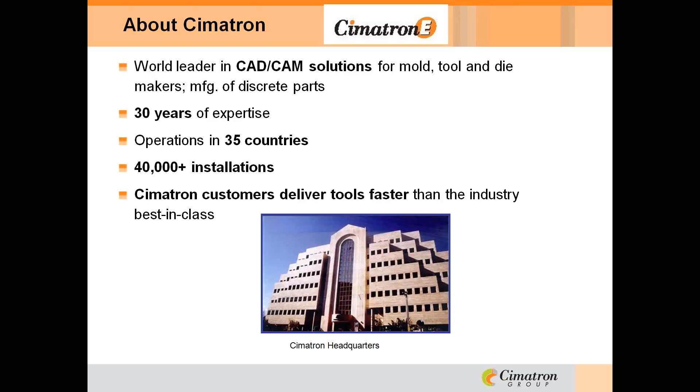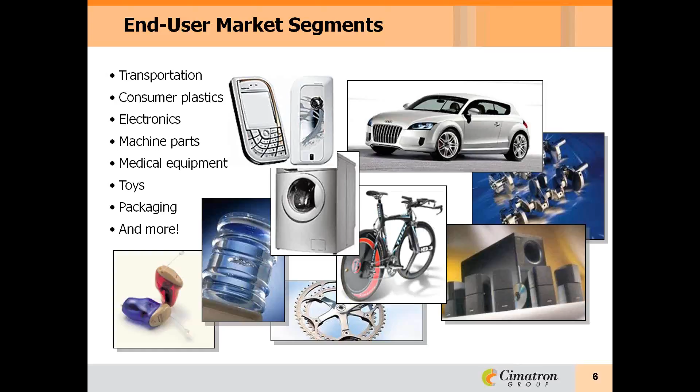We have loyal customers in 35 countries and over 40,000 installs in place. Companies using CimatronE design and build a wide range of products. Our global presence means that we can often be found working with multinational companies in a variety of markets, and we help them find the solutions that they need.

Not long ago, Aberdeen, an independent research group, conducted a survey on tooling delivery times. Delivery time is where the real competition is for new tooling, and we recognize it as a critical measurement. So we're very happy to say that shops using CimatronE will typically outperform even the best rated shops in this regard.

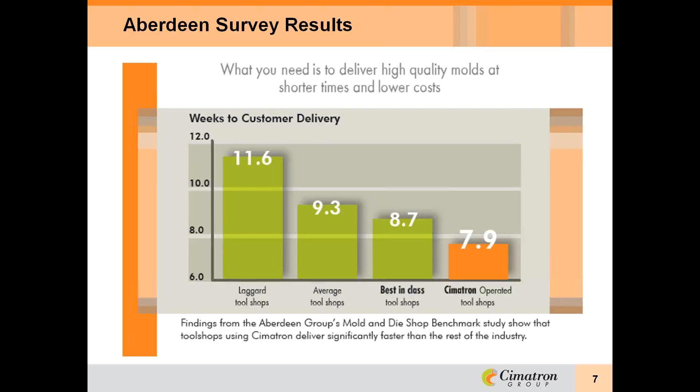In our presentation today, we want to elaborate more on some points that we first laid out in an article published in the December issue of Mold Making Technology magazine. And we're going to start with total process thinking. If the goal is truly to deliver on time and better than the other guy, then there's no room for any holdups in your system. New technologies can and do make for a better process, but only when they streamline the job flow rather than reroute it to some other spot.

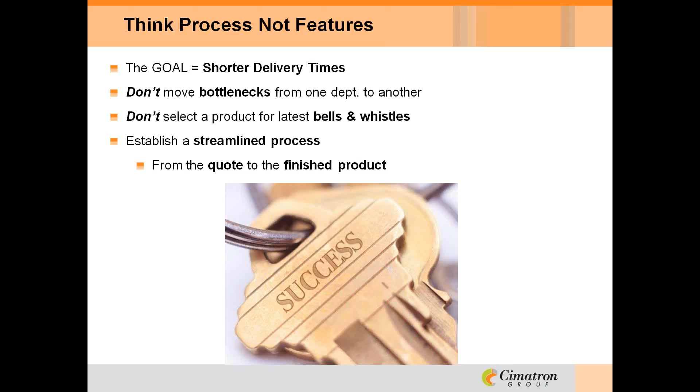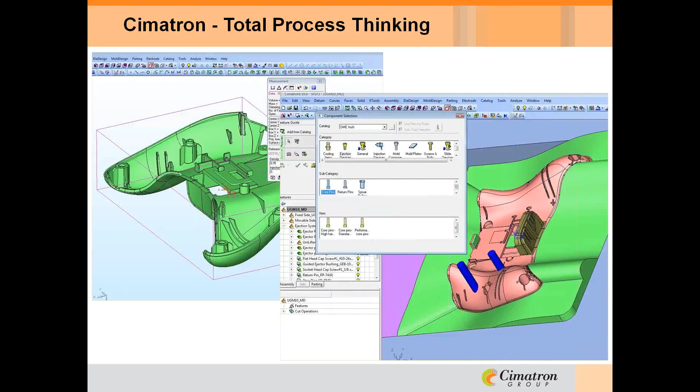CimatronE CAD/CAM software covers every facet of quote, of design, and of manufacture. It's our goal to provide the best functionality for the task at hand, while always keeping the next task in mind. When delivery times are compressed, seamless flow is essential. So jobs move quickly from part analysis and quote to tool design to NC programming and electrode design.

Now, seamless flow does not, however, mean that the process must be linear, and that's important. The way to add efficiency is to facilitate every task with enough initial data to get started, and then keep those doors open and information flowing to simultaneous activities. And it's possible when using a unified CAD/CAM package that understands the needs of tooling and is built with this total process in mind.

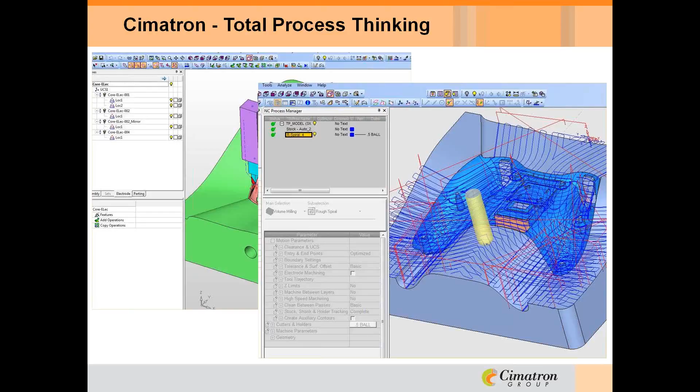When it comes to quoting for tooling, which is our other point here, you're going to need a lot of information from a part and not a lot of time. Part size, volume, projected area—these all help you determine the mold size and the press that will accommodate it.

Mapping techniques can be used. They can show curvature on surfaces, and they can show smoothness problems on surfaces. We can also talk about analysis of draft angles. These will quickly identify problem areas for molding, as well as highlight undercut areas that add complexity to the tooling.

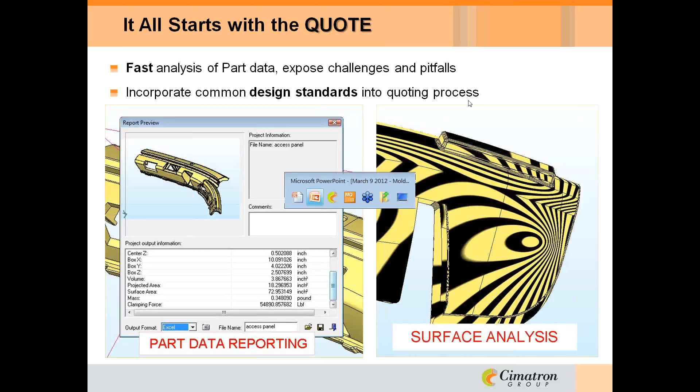This is my first opportunity to switch over to CimatronE itself, and here I want to show a little bit about draft angle analysis on an example part.

So the system will consider a direction for mold draw. Let's go in there.

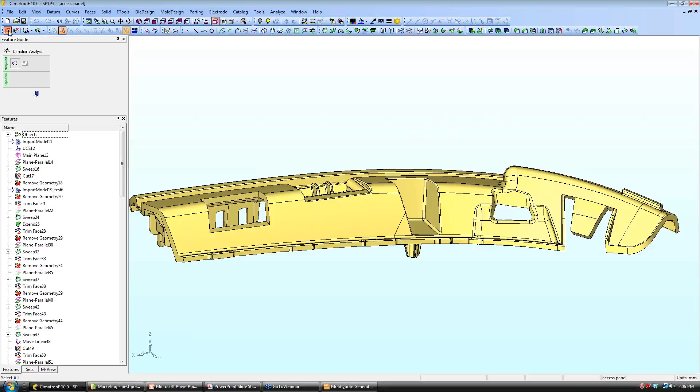What we have is a colored display that allows potential problems to easily be found. Here we're looking in one direction, like from the top. We can even use the cursor to give specific information on certain angles. So let's say on the back of this part, we could look around and possibly find problem areas that are very difficult to see just with the eye.

In this case, any area going red is going to indicate areas that cannot be molded along the main direction of draw and might require more expensive cams or lifters.

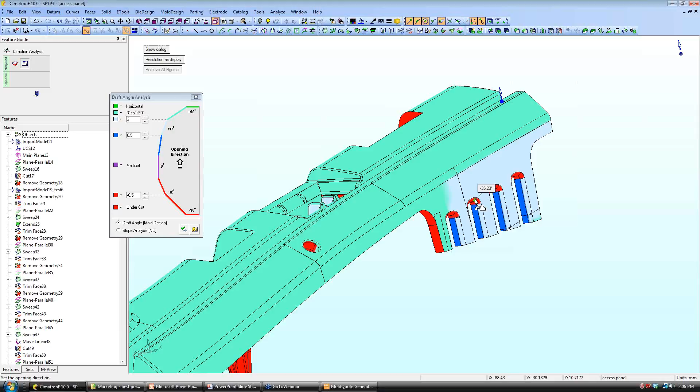On the screen now is what we call Mold Quote Generator. The CimatronE Mold Quote Generator is another application to help mold makers achieve more accurate quotations by using the project details from CimatronE and also the cost-related details from your prior experience.

All of this goes into a database. It's used to store your quoted work, and when combined with standard practices and components, can estimate the labor and material cost.

We can adjust a lot of things in this product, but again, it learns from the previous molds that you've designed. They stay in the database, and there's a link to the data that you're getting out of CimatronE.

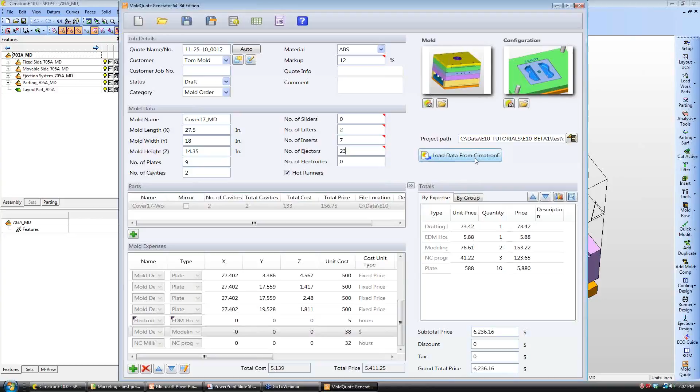We'll come back to our presentation for a second to move on to the next point, and that is standardization whenever possible—that was a point that we laid out in our December article as well. And what it means is a lot more than purchasing off-the-shelf components. It means striving for efficiency by finding repeatable patterns of design and methods of machining.

CimatronE makes it easy to use the components from previous tool designs and provides a template mechanism that repeats your favorite styles of NC, of electrode design, or even drafting. I want to demonstrate a little with that.

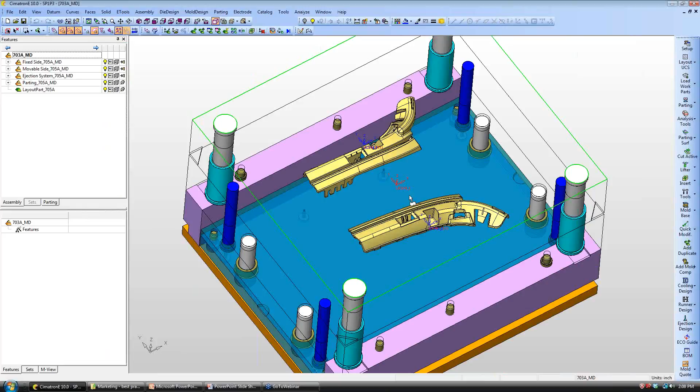So in a 3D environment, any work you've done already to prepare for quote is saved for tool design. On screen right now is a layout of both left and right-hand versions of the part. Stuff that was easily placed in for quote can be edited.

We can look at some standard components here. So these might be from common industry suppliers, or we have an easily customized table CimatronE developed for mold and die makers alike who build in-house standards.

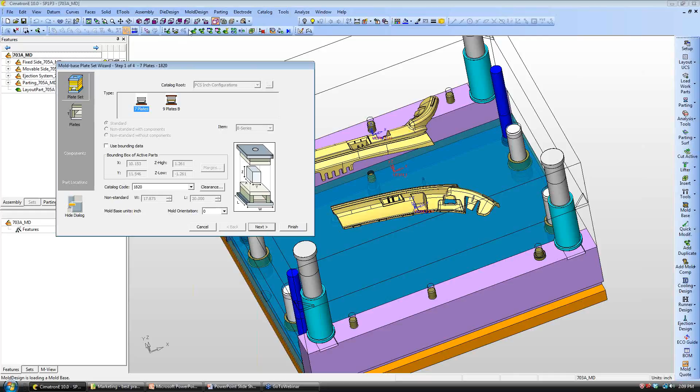Either way, edits to the quoted starting point are easy to apply as the tool design progresses. So let's come down to just the parts here.

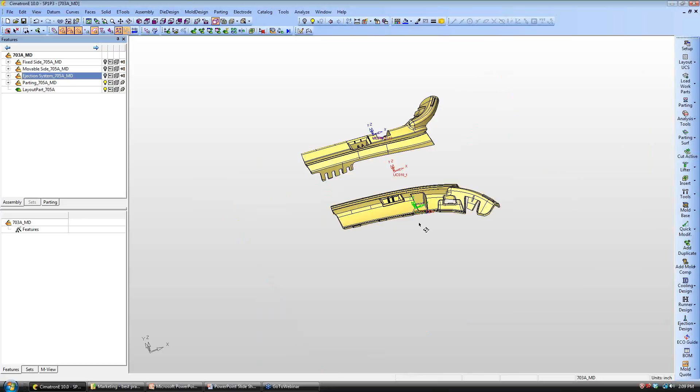One of the best tools in the CAD industry for finding parting lines is CimatronE's Quick Split. Regardless of the part quality, this is an analysis that scans every surface, and even minute problems that may have been previously overlooked are going to be brought to light.

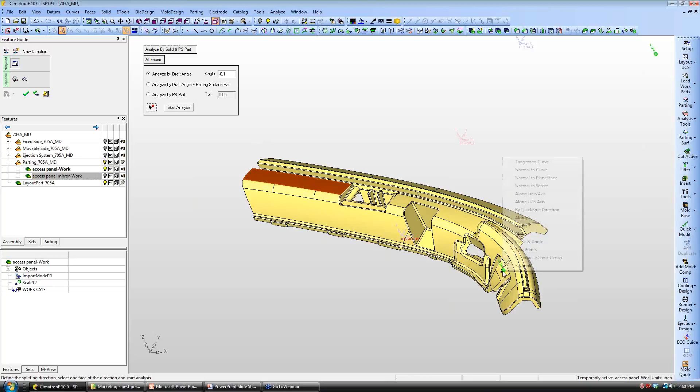Again, we have a vector to determine the direction of draw, and we run the analysis. The draft angle analysis is also in here if we want to take a look at that, but we've already seen it.

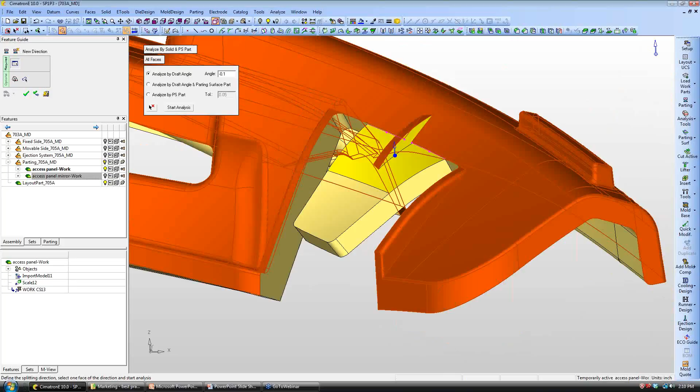What I want to point out here is this area in yellow and even these edges in pink. It's very small, so I'll have to zoom up quite a ways. But the bright yellow highlighted face is a face that's partially occluded by a very, very small overhang here. It's probably unintentional, but part mistakes like this have to be found early on in the tool design process, and Quick Split does help us do that.

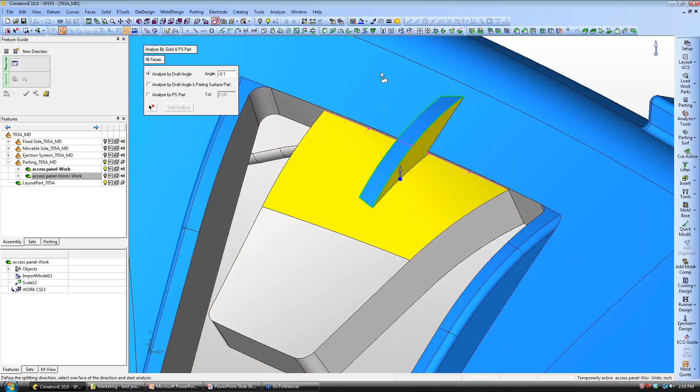Let's accept that side. We'll flip the arrow over and take a look at the bottom. Again, run the analysis.

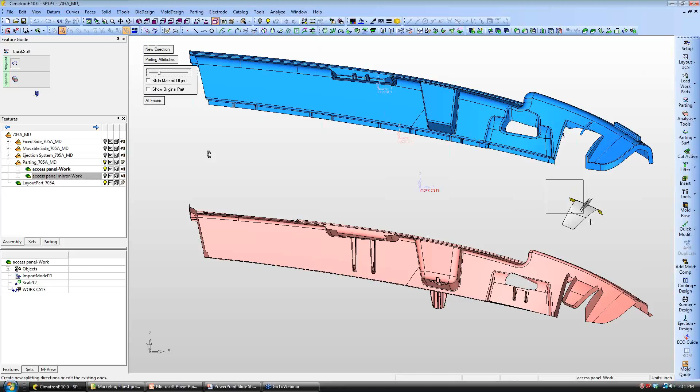So once we've got a little going here, we can open the part up, and we visually see a bit of the mold action that's going to take place very early on here just by dividing up these parts. Now anything that's left over is going to be something not assigned to cavity or core direction. These have to be looked at by a little bit further analysis.

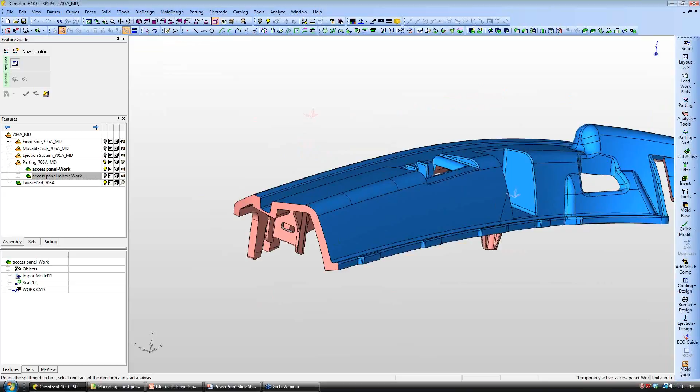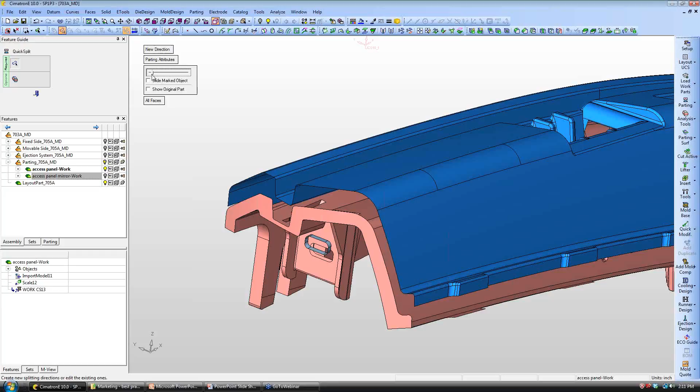So we'll come back to another direction, and we'll make the vector from any number of things. Let's say normal to face, and pick a surface to start analysis here. So any number of these pull directions can be specified and then animated to see how they'll look in the tool.

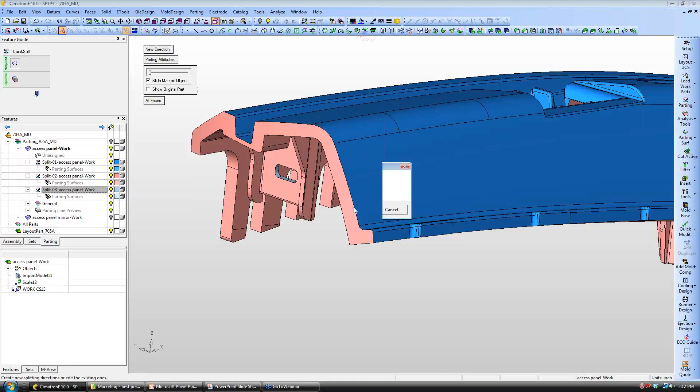Let's move a little farther ahead. So we've been working on the tool design here, building some shutoff. I'm going to access the Quick Split and get rid of one of the sets we've defined here so we can look at some of these other surfaces a little closer.

Mold design is made up of many tasks, and creating shutoff faces around the parting line is definitely an important one. Often this is complicated work, but good parting surface functions will save a lot of time. While design methods do vary, one common need is to extend the part faces while maintaining their natural shape, and Cimatron provides an excellent tool to do that.

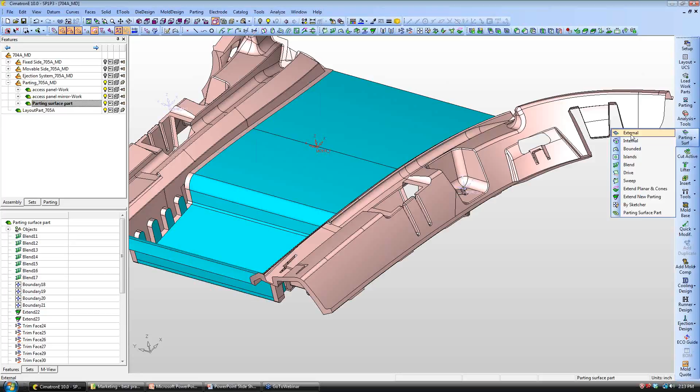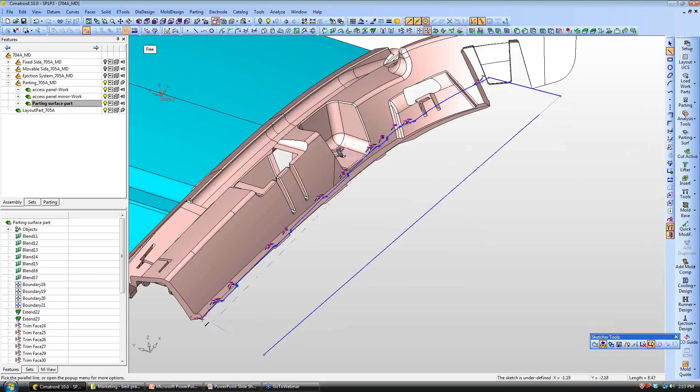Basically, we can look at any surface and make an unlimited amount of adjustments to the boundary live and on the screen. With a quick method of deleting some of those boundaries, we can now invent our own, much larger than before, which gives us an excellent preview and natural extension of a parting face.

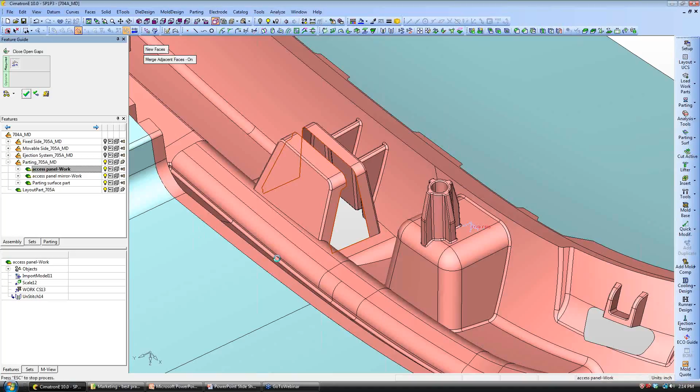That pretty much makes the ideal pocket for that area. While all of this is going on, creating surfaces, design, shutoff, any opportunity we have to order parts or to get machining started is going to compress those delivery times that we're talking about.

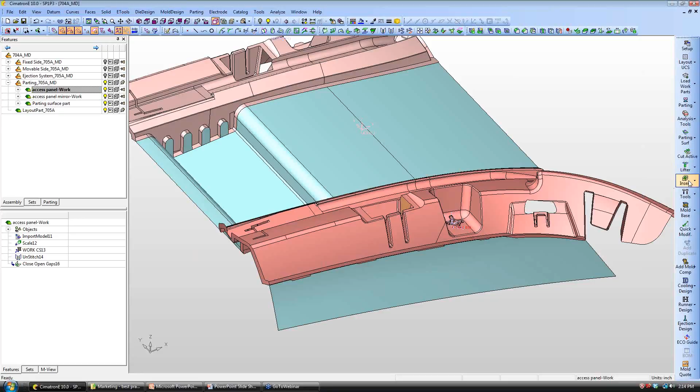So with very little data in place so far, what I want to do is show you a specialized tool we have for lifters or inserts, those kind of things. That's going to require pushing a couple buttons here. So let me turn on our ejection.

We had the mold base dropped in from the quote, and I'm going to go to Add Lifter, out to Standard Components. A lot to choose from here, and this is something we have developed out of the DME catalog.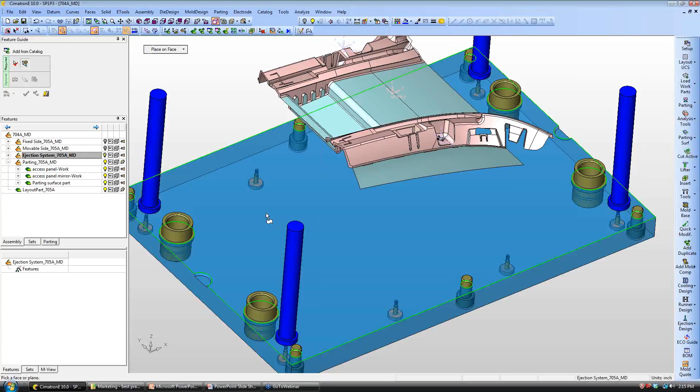To add an assembly, we just want to create a few references from our geometry that we have here already. And then we can drop a point on the screen, and make a few adjustments to the position.

So we're doing this well before any official cavity blocks, core blocks have been defined. But we can start roughing this stuff in, and it's more than just roughing it in. We can actually use it from this point.

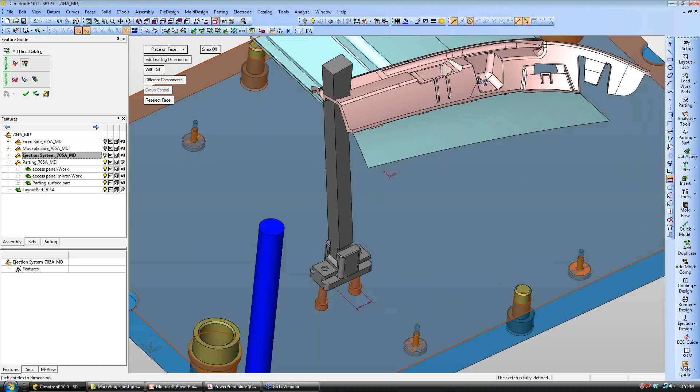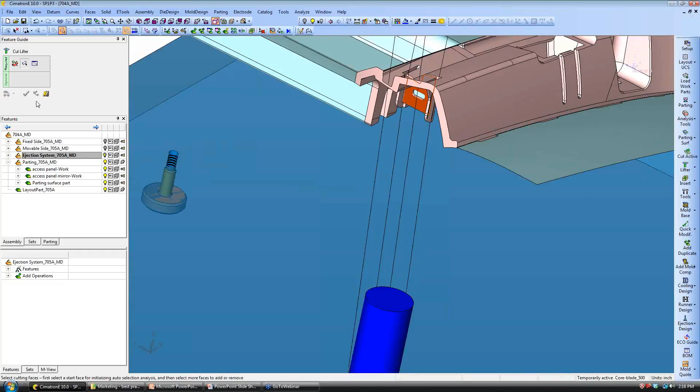So now that we've placed it in, I actually want to cut it to shape. And again, I'm going to do this by referencing nothing more than the original data. We don't have the cavity, core, etc. defined. But on this lifter blank, we already know we're going to need this shape, and to cut that on there.

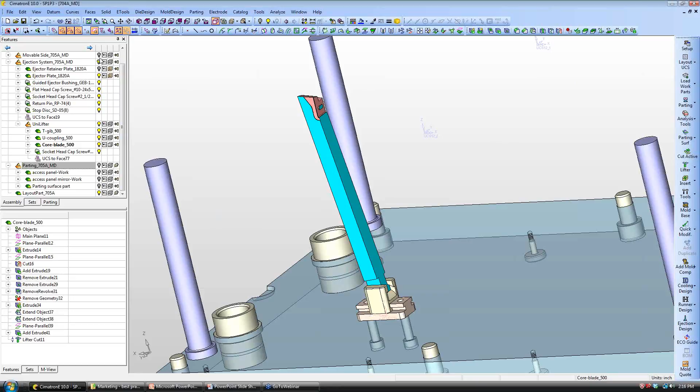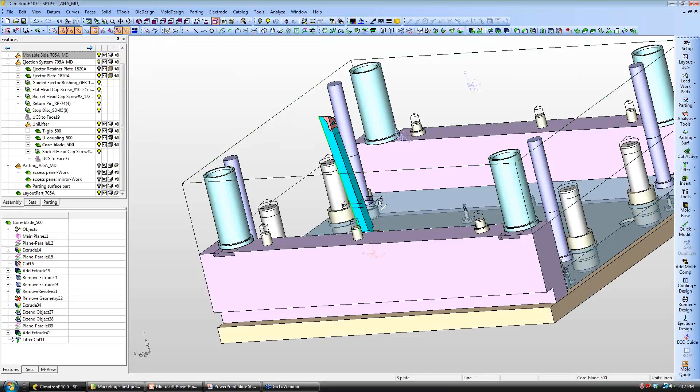Let's take this idea even farther. We've got small built-in cutting objects created in the standard parts. So if we were to turn a few things on here and maybe do a dynamic section, you can see that we're getting a lot of design done rather quickly, pockets, etc. And more than that, the lifter itself can be sent right into CimatronNC to get machining started in the shop.

So let's make some prep for that. Let's quickly define an axis for machining.

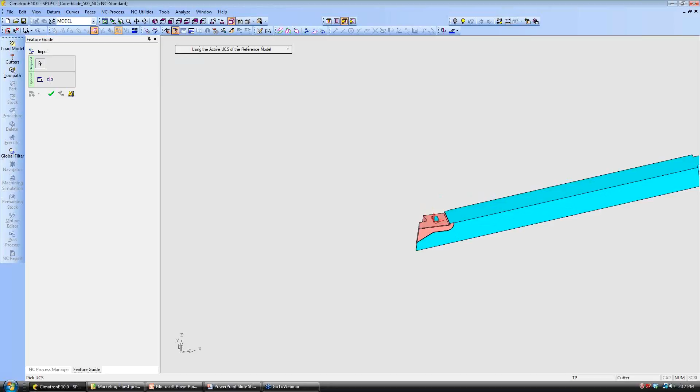So like we were talking before about smart technology and Cimatron helping you out, what we're going to do here is use a template. Templates from NC are saved from any previous cutting that you've ever done. If the general order of procedures is the same, then a template can be used over and over, regardless of changes in the size or the shape of what you're cutting. The geometry to be cut is recognized by color or any other criteria that you can really put in place.

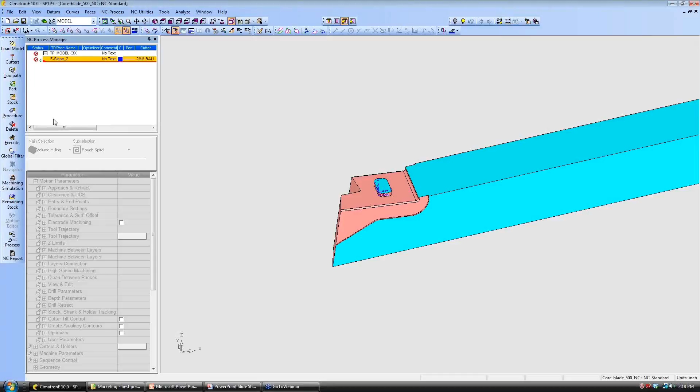So let's apply from a number of templates I've got saved here. Here's one for lifter machining. This creates the toolpath that creates everything. We'll just execute it and see what we get here.

So again, smart machining based on something I've done previously that was similar.

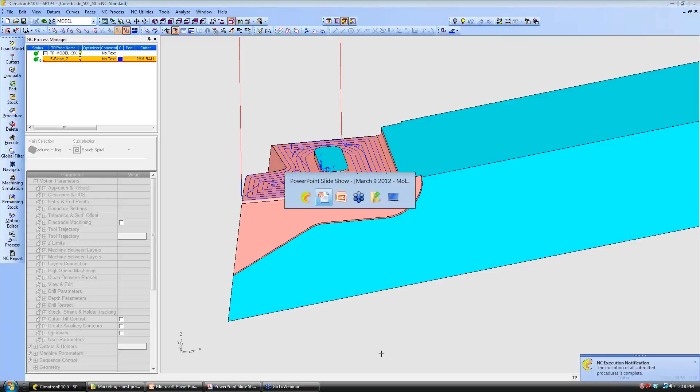So there's a few points. Our article touched on quite a few. Let's talk about one we're calling concurrent engineering. By our definition, concurrent engineering means getting the data processed through various tasks in the timeliest manner possible. This gets all the departments involved sooner and even provides for some flexibility when scheduling.

In addition, many Cimatron customers have CAD stations placed around the shop. These are used for verifying dimensions, for cutter paths, even saves more engineering time when they can look stuff up themselves. Even receiving part changes, which is a very real and common occurrence, it has to be incorporated into all this design activity that we're doing with as little disruption as possible.

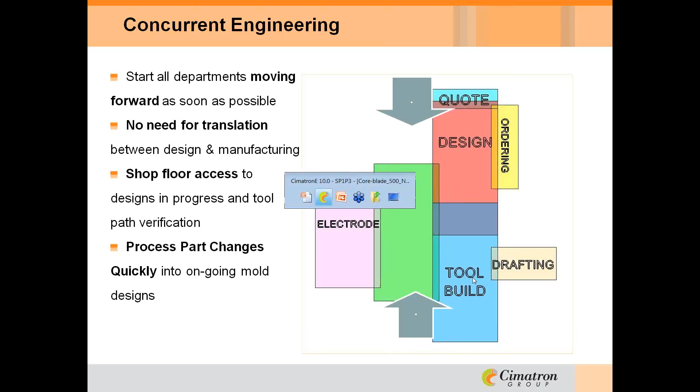That takes me back to Cimatron again to talk a little bit about processing an engineering change. So again, we've moved even farther down the design road here, but typically the case, the design is going to be well along when a part change comes in. We want to implement this change in the quickest possible fashion.

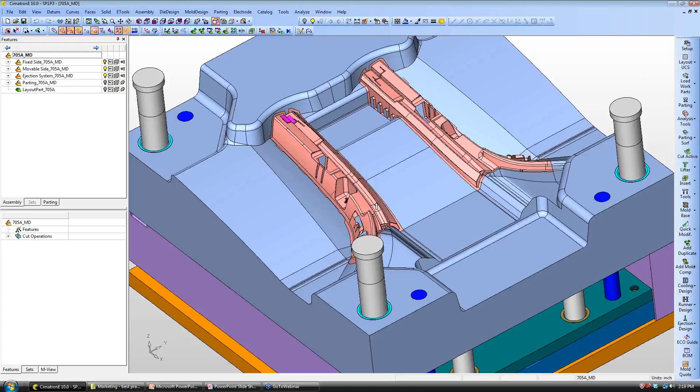So what we're going to do first is we're going to overlay the new part with the working model in the mold design. Turn off some of what we've done here. The part, of course, is still here waiting for us. And we'll browse out to the new data that we've received.

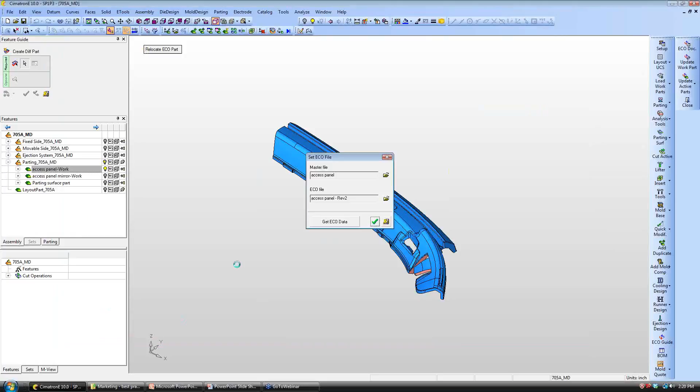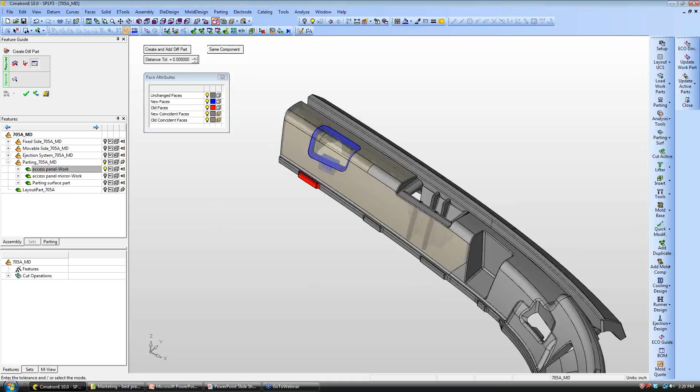Compensation for plastic shrinkage is a value stored in the design, and this is going to be applied to our new part automatically. We don't have to worry about that on the revision. And this resulting comparison shows a red and a blue color display, illustrating the new geometry being added and the old geometry being removed. We'll hide what we call the unchanged faces here, and you can really see a little better what's coincident with the old faces and what's actually brand new geometry coming into the part.

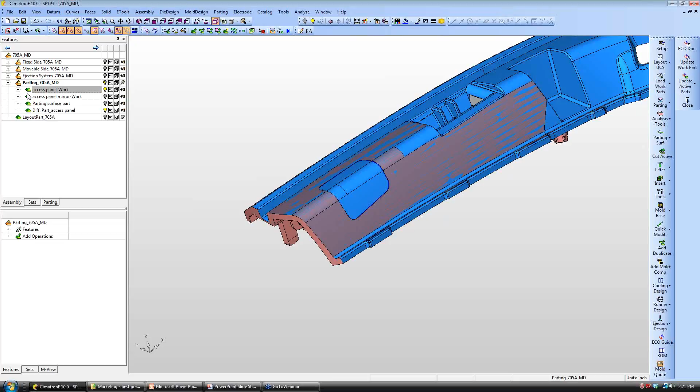Now, because of the associativity between this work part and the cavities that have already been designed, the system can next remove obsolete geometry right out of the design. It automatically understands only the mold components that are affected and only which surfaces need to be removed. So let's take a look at that.

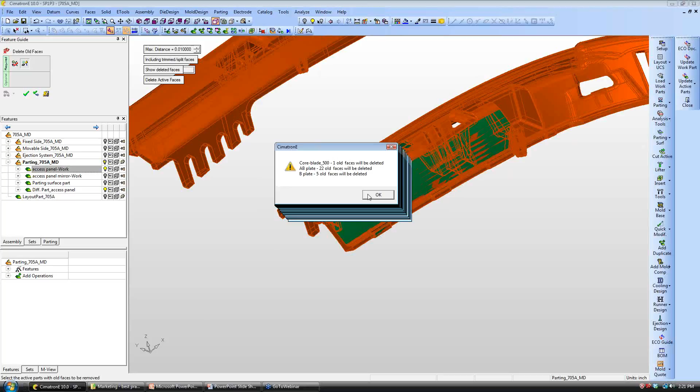We'll ask to show what it's going to delete. And here's the pop-up. In the lifter, it found one face that's affected. In the A plate, a bunch of them. And in the B plate, a few also. So this, again, is going right down into the design that's in progress, and it's taking stuff out in preparation for adding new geometry in.

I think we should take a quick look at that. So here's the part we were working on, and you can see that now a large quantity of that area is missing.

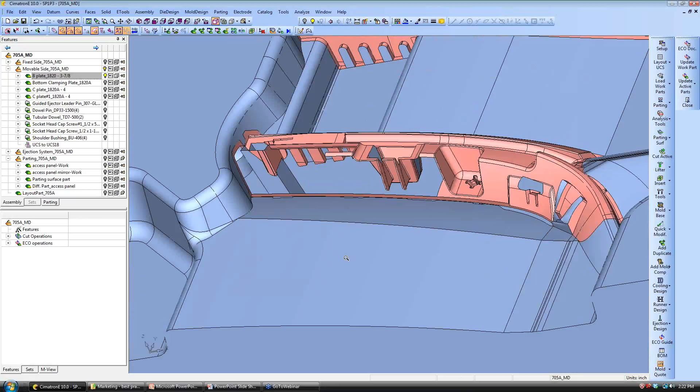Now that quick split function that we used earlier is going to help out again when we're processing this part change. All we really need to update now in the mold design is going to happen by assigning those surfaces into the existing knowledge of how the part was assigned and divided.

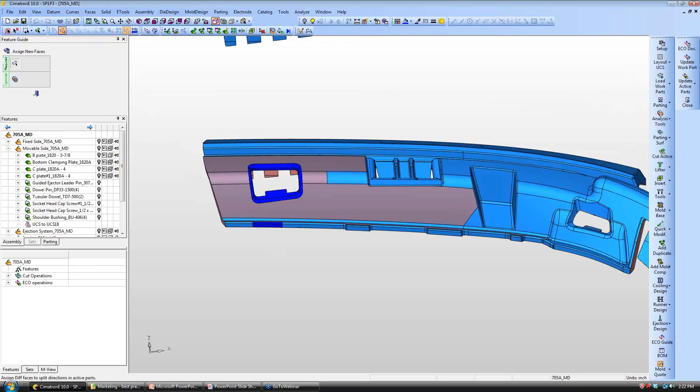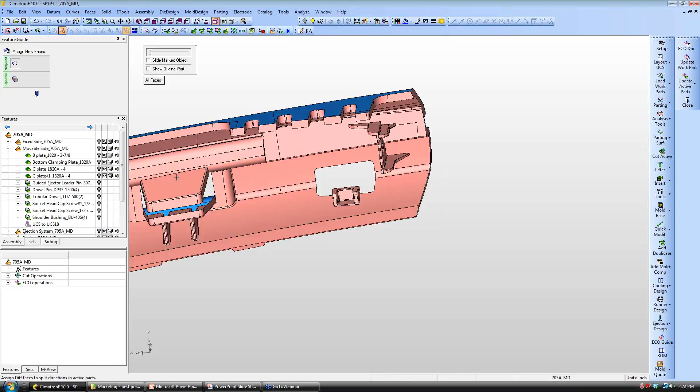So we'll add a little into the blue, the set that existed before, and to the bottom side as well. Maybe a few more here to clean up. We can open it up again, take a look at everything that's happened to the change, and that's good to go.

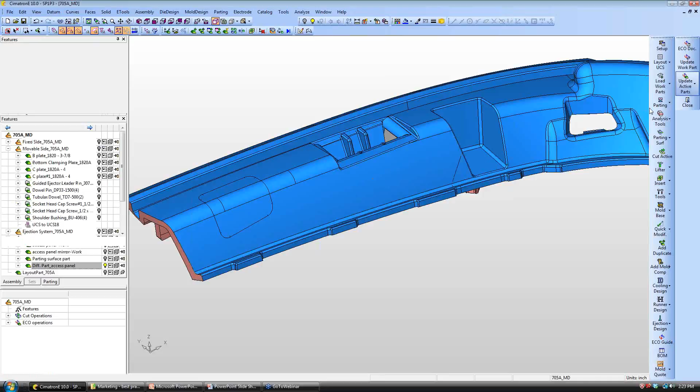New geometry has taken the place of the old geometry.

Now, most real engineering changes are invariably going to affect not only the part, but the parting line as well. So the current change adds this new window opening, and of course we do need to keep designing, add new shutoff in here, and fix a few things. So let's work on that very quickly, but we've already seen that Cimatron has functions that can help.

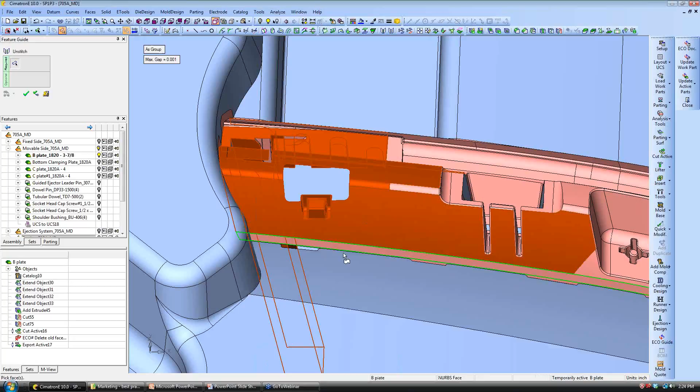In fact, we'll use the close open gaps function from before to find that area, and we'll see that it can work to shut that off for us as well. So by bringing that change right into the design that's in progress, Cimatron is actually allowing you to avoid a bunch of time-consuming regeneration of parts and also the possible conflicts that can result from that regeneration.

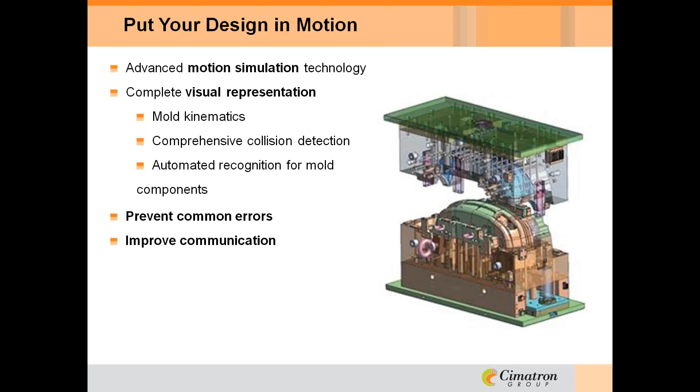The last point I want to reference from our article has to do with designing a moving object. A static CAD environment is a challenging area. Mold designers like us have long grappled with this. Fortunately, CimatronE provides advanced motion simulation technology for mold kinematics, featuring automatic recognition of common mold structures along with comprehensive collision detection. There are real benefits: they prevent common errors and improve communication with customers because you're able to see things in motion. Let's take a look at that.

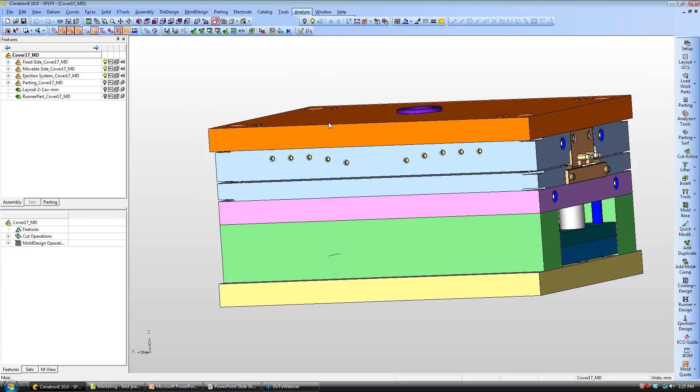We've got a little different design on screen here. The motion analysis in CimatronE was conceived to understand the contact and range of motion of the tool. In this example, what we've already done is grouped the main systems of the mold together as fixed, movable side, and a few other things we see in the upper dialog. We can run an initial collision test to make sure no interference exists while the groups are at rest, like now.

But then we define some motions. The system set into motion a mold is by the opening of the molding press itself, so that's all you have to define. The dependent mechanisms, like lifters and slides we have here, are driven by angled pins. You don't need to define those—the design itself guides their motion. Okay.

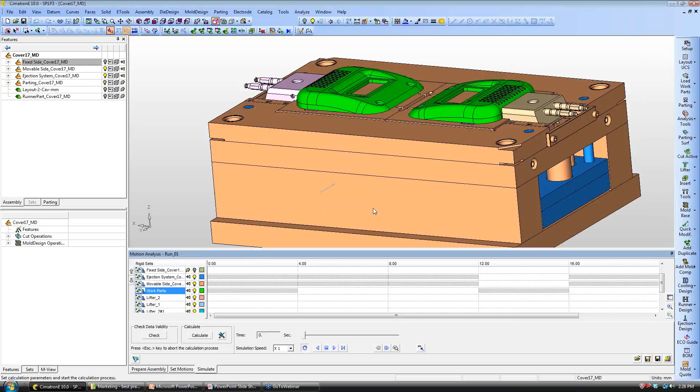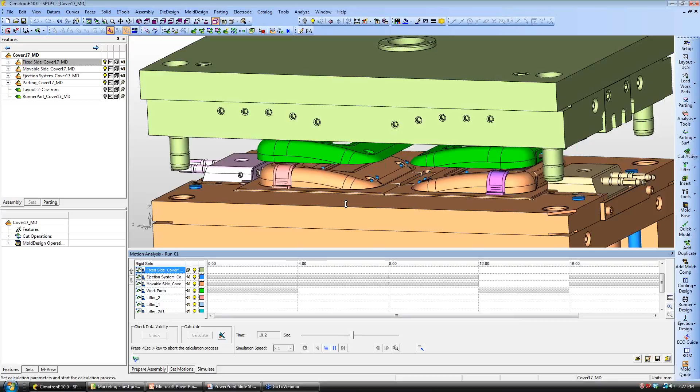So we'll set this into play. This is really true virtual tool building. Any collision of components that happens is going to bring a halt to this simulation, and it's going to highlight the design area that caused it. There are a lot of things we can do with this dialogue. We can save it off to a movie. You can send it to your customer and say, here's what's going to happen.

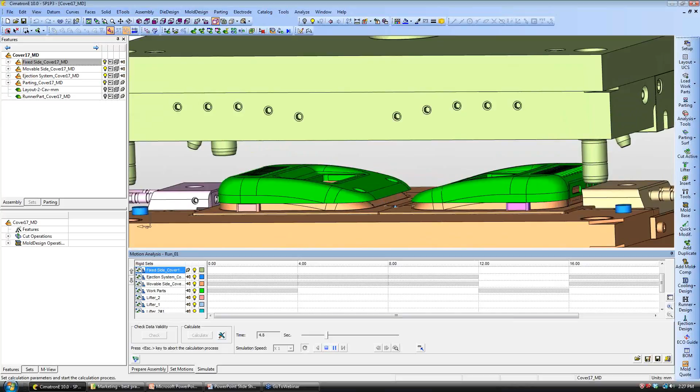Let me try to zoom up as good as I can here so you can see that the slides do move back and forth, and lifters are taking place. This has really been a neat tool for us.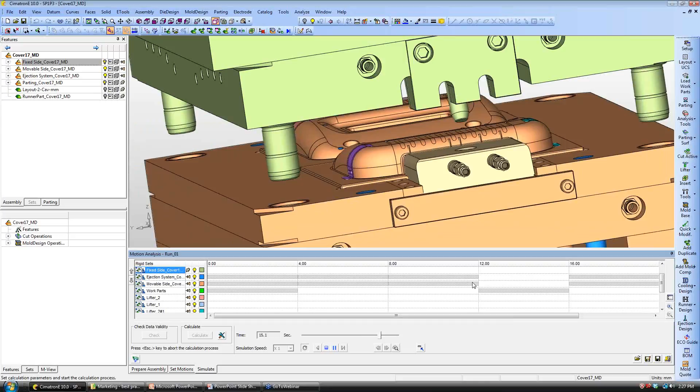Well, what I hope to illustrate here today is the CimatronE philosophy, really—CAD and CAM for the entire tooling process. Our customers are not just those in the mold business, but a worldwide spectrum of die and fixture, pattern, and machine makers. You're going to find us anywhere. There's a need to work with data from a number of sources, then design and build the tooling to deliver the product, and we hope to help you do it in record time. That's kind of my review. I do want to hand off now our presentation to Tom Bergman.

Hello everybody, this is Tom Bergman, and to tell you a little bit about our company: Aluminum Injection Mold is based near Rochester, New York, in Leroy, New York. We were founded in 1985. We are a pioneer in providing creative aluminum production molding solutions in the markets of automotive, computer, business machines, telecommunications, consumer products, and medical.

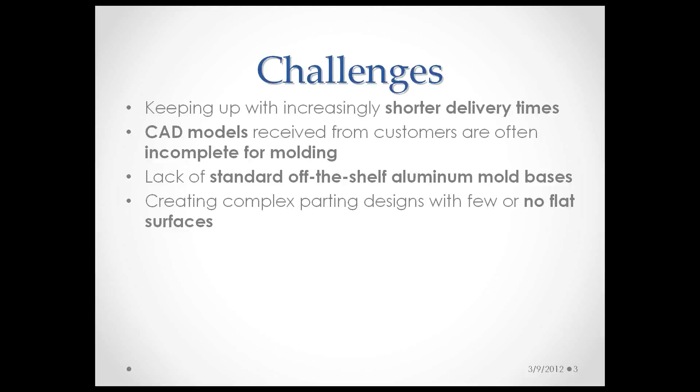The challenges that we face are keeping up with increasing short delivery times. Now and again, we receive CAD models from customers that are often incomplete for molding, and because we build aluminum injection molds, there's a lack of off-the-shelf QC10 aluminum mold bases for us to purchase, so we have to produce our own, along with having to create complex parting designs with few or no flat surfaces.

So a few of the areas I will be focusing on today are areas AIM has streamlined in its operations: our niche market, process and people, how we are machining, and how Cimatron plays a key role in our successes.

We have a distinct advantage because we strictly build aluminum molds, and because there are no off-the-shelf QC10 aluminum mold bases, we design and build every mold in-house from the ground up. Some benefits of QC10 aluminum are its machinability, its through-thickness hardness, the ability to high polish it, and its thermal conductivity, which allows for simple cooling patterns like you see on this photo of this mold we built. These water lines just go straight in and out, and we typically won't see more than a degree or two difference anywhere you measure the temperature on that mold.

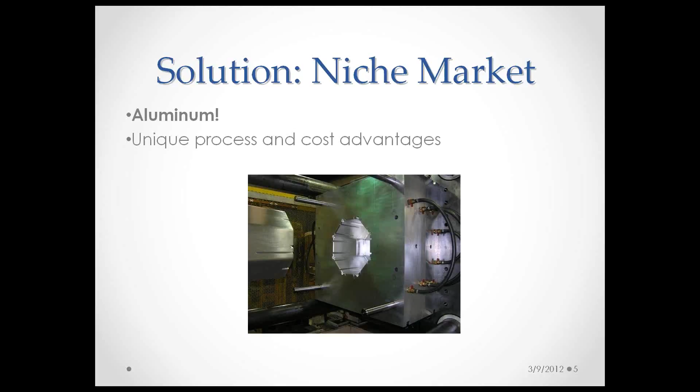Unlike most companies that have different people assigned to each task, AIM assigns one mold maker to handle a single project from start to finish. Instead of having one person do the design and then hand it off to someone else who's not familiar with it, we have the same person do the mold design and then machine the mold right up to completion. And that same person will even sample the mold in our molding press.

Each employee has a complete understanding of what they are building. There are no surprises. They are building the mold they've designed, which leads to more efficient mold builds. Also, we can spot trouble early on in the mold design phase.

When we get a customer's CAD file, as we're bringing it in, we can tell whether the CAD file might have some troubles in the mold phase, pointing to such things as wall thicknesses that might be too thick, or where they might not have enough draft and the part could hang up.

It's a little more difficult to find individuals as our workers to meet these requirements because we are looking for people who can perform multiple tasks and take ownership of the entire project from start to finish.

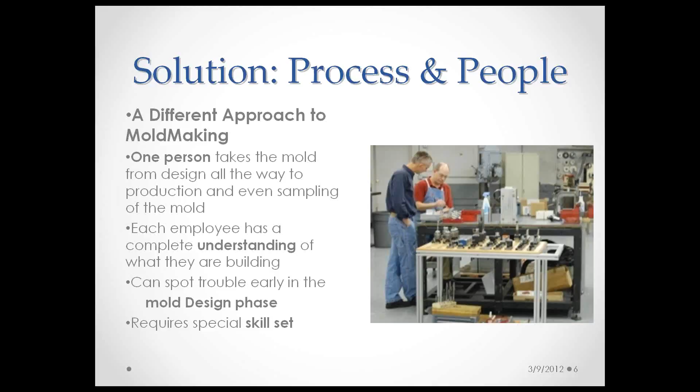All our CNC machines and molding equipment at AIM are standardized on the same brand, so there are no variations in production or multiple types of machines to learn. Our control units on our CNC machines are all the same. There's nothing new to learn, so no time is wasted programming for one type of CNC versus another.

And the same goes for our molding machines. They all have the same controller, so you can walk up to one controller, whether it's our 55-ton or our 300-ton, and it all works the same.

And we do as much machine maintenance in-house as we can. We stock, for our CNCs, an extra spindle on the shelf. That way, in case one of our spindles goes down, we can change it over right away. And that's why we like the commonality between all our machines.

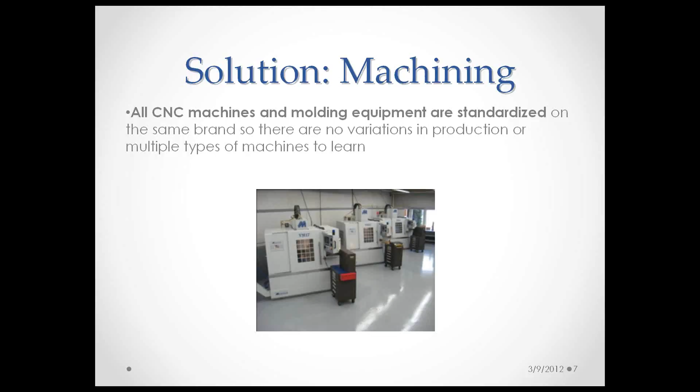CimatronE is great for our approach because we never have to leave the software, and we like to standardize that too in our process. We use it right from the beginning, from the quoting process. When we get the customer's file, it's great for viewing and analyzing the part. If we need to do volume checks to see just the size of the plastic part, we also have it not only for quoting mold build, but also quoting part molding.

We have designed a few mold bases of our own in-house because we don't use standard mold bases, since we can't get them out of aluminum. So because we've designed a few of our own, with just a few mouse clicks, we can size up any mold base for any project. A couple clicks, the mold base stretches, and we're ready to go.

CimatronE can work with incomplete customer CAD files that might come with surfaces missing or might not have drafts or certain radiuses. That's where CimatronE is powerful, because we can take an incomplete CAD model and start working with it right away instead of losing time going back to the customer to ask them to fix and add a little bit of draft.

What we've always liked about CimatronE is its ability to take a file that's dumb as it's translated in, a customer's dumb solid file, and we can do solid functioning on it right away. Fan molds in particular are a challenge for us because there's nothing flat, so all the shutoffs tend to be rolling and curving geometries with very little flatness. We've found that CimatronE has been very effective in doing that kind of shutoff work in the mold design.

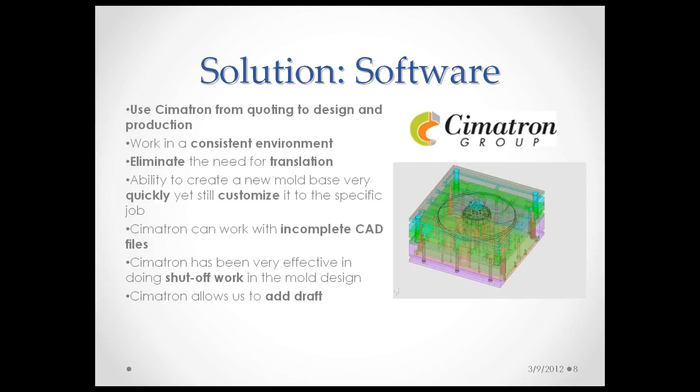In addition, some of the files come undrafted and we need to draft certain parts. We just had an issue yesterday with a mold design that was already complete, and we found some areas that didn't have draft. Instead of wasting time kicking it back to the customer to update the CAD model, we were able to go in very quickly and just modify that file, and get right back to finishing up the mold.

So with all that being said, we found that using that approach with some of these solutions has helped shorten our deliveries, where we can turn around and deliver molds in weeks instead of months.

I liked in particular what Dan had shown earlier about templates. An example is this fan here - we had consecutive jobs where we built 3 fan molds, one right after the other, and we were able to use the templates from one instead of going back and recalculating all the step overs and processes for the machining. We were able to just pull the templates right in, and we were able to generate toolpaths in a very short time on the next fan, utilizing what we had done from the previous job.

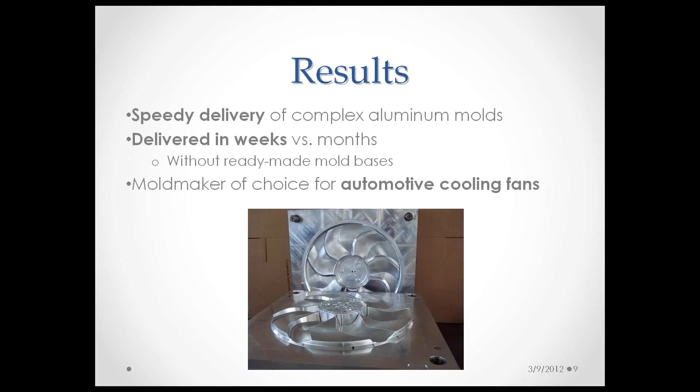So I just wanted to say thank you for giving me a little bit of time to show you about what we do and how we use CimatronE as a major tool for helping us get our work out the door. Thank you.